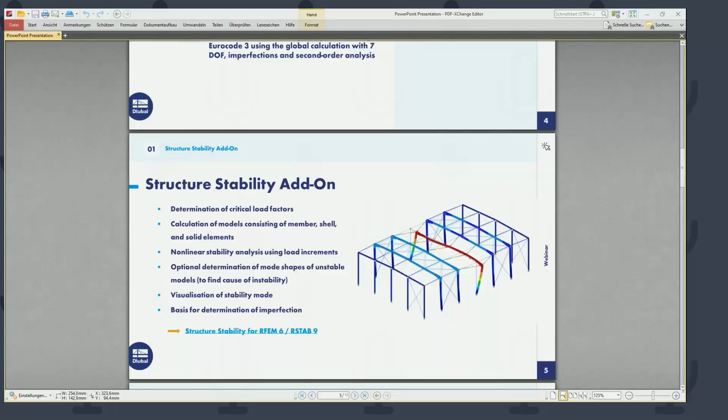First, I want to present the content overview. We are talking today first about the determination of the critical load factor using the structure stability add-on in RFEM. Then the second topic will be the consideration of cross-section warping in the global calculation using the torsional warping add-on for 7 degrees of freedom. We also want to talk about the lateral torsional buckling analysis according to Eurocode 3 using both add-ons in the global calculation, with 7 degrees of freedom, imperfections, and second order analysis.

The first thing we want to look at is the structure stability add-on. Here's a short overview of the features of this add-on. We can use it to determine critical load factors for our structures and also calculate models consisting of member, shell, and solid elements. In this webinar, I'm going to present members in the structure stability add-on, because we also want to show the combination with the 7 degrees of freedom calculation. Shell elements and solid elements will likely be part of another webinar in the future.

Another feature of the structure stability add-on is the nonlinear stability analysis. We use incremental loading to calculate nonlinear systems in this add-on. There's also an option that helps us determine the mode shape of an unstable model, so we can find the cause of the instability. We will look at this in the webinar today. We can also get a graphical representation of the stability mode shape and use it as a basis for the determination of imperfections.

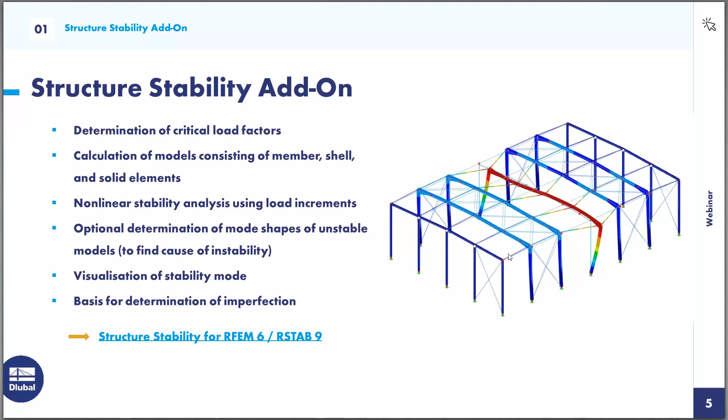So I will switch to RFEM for the first example. It's a very simple example: a simple steel frame with rigid frame edges and simple supports. We have one loading condition, with vertical loading and a horizontal load. We want to look at all the settings necessary to perform a stability analysis with the structure stability add-on for this example.

First, if you want to use the structure stability add-on, we need to activate it in the base data dialog. I go into the edit model base data dialog, and there's a tab for add-ons where we can activate the structure stability add-on. You've probably noticed that in the main tab of the base data, we've chosen the model type 2D. So if we have chosen only this 2D model type, the structure stability analysis will also be performed in this 2D plane stress environment. We will see, in the first step, only mode shapes for this 2D structure.

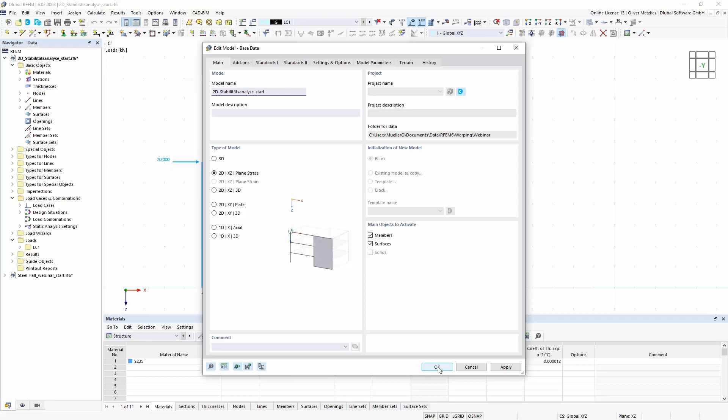Now that I have activated this add-on, we see in the navigator for the data that we have an additional stability analysis setting. Without the stability add-on, we don't have this setting, but now it's here with already two predefined stability analysis settings.

If we open the first one by double-clicking on it, we see that in this stability analysis settings, we can set all the options that we want to consider for our stability analysis. An important choice is the stability analysis type: we have this linear eigenvalue method for determination of the critical load factor, and also an incremental method for calculating nonlinear systems. In my example, I only want to use this standard eigenvalue method for the linear system, and I don't want to change the other options for now.

When we have our stability analysis setting, we can also assign it to our load case to start the structure stability analysis. I can edit my load case number 1 by clicking the Edit Load Case button, and then we see that if we have this stability add-on activated, we have an additional option here: Calculate Critical Load Structure Stability Add-on. If we activate it, we can choose in the drop-down list our corresponding stability analysis setting that will be applied for our stability analysis.

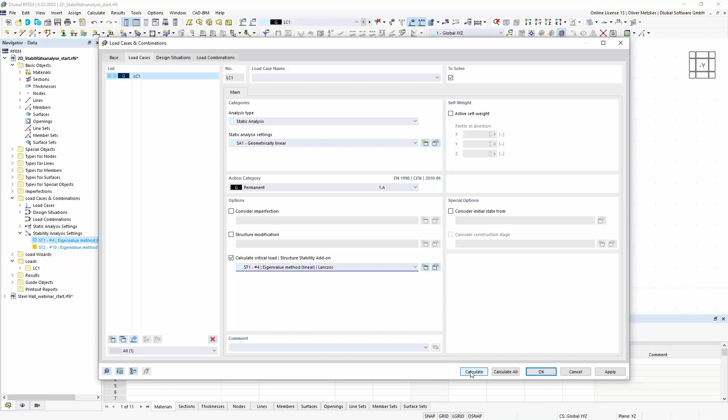If I calculate now my load case number 1, we will see in the calculation diagram that first the static analysis is performed of load case number 1, and that is used as a basis for the stability analysis. When we have calculated our load case number 1, we will get the internal forces and support reactions for the static analysis, and we can also switch to the results of the stability analysis.

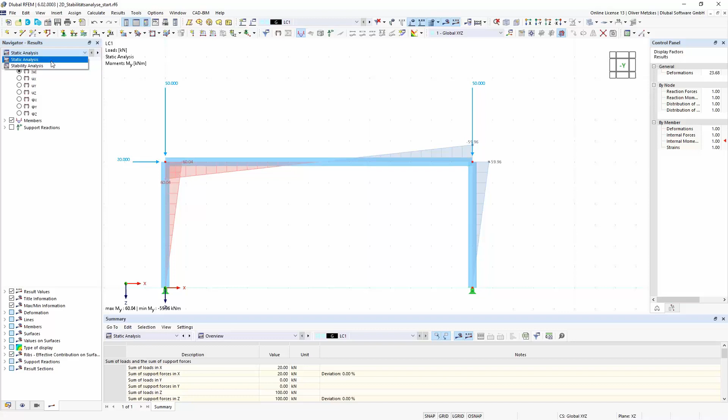In the navigator for the results, we have a drop-down list where we can switch between static analysis and stability analysis. If we switch to stability analysis, we will see the graphical representation of the mode shape, and by default for the members it's represented by line display.

We can also choose the display mode. Here in the navigator for the results, we have options at the bottom. If I choose to display my deformations for the members by colored sections, I will get this colored representation with the sections, which is mostly easier for the imagination of the mode shape.

I also get the results in the tables. So in the result tables for stability analysis, I will now see my critical load factor corresponding to the first mode shape. For this example, the first critical load factor is 33.6. That means if I multiply the load of my load case number 1 with 33.6, I will have the stability failure with this mode shape of my simple frame.

Okay, so that is the result that I get, and I also get further mode shapes according to my setting in the stability analysis settings. Now, I have said that this is only a 2D structure, so the first mode shape is this in-plane flexural buckling of the frame, and I don't get any out-of-plane buckling shapes.

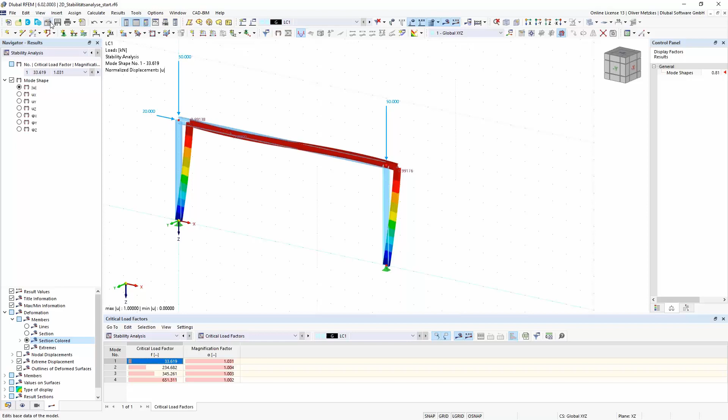If I also want to consider the out-of-plane buckling, I can go into my base data dialog and change the model type to 3D. I will do so. And then I can also just try to calculate it again.

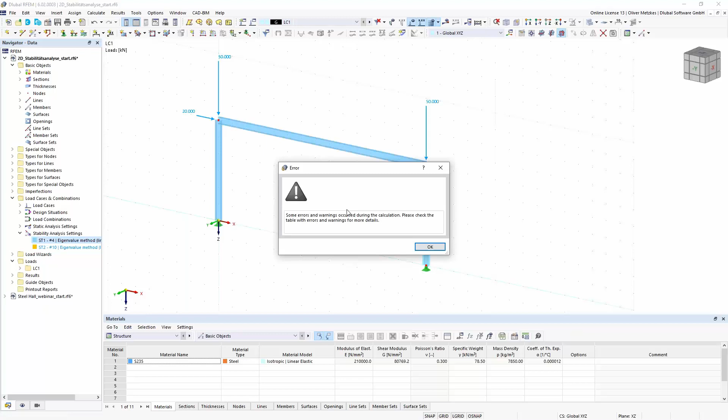Then I will see I have not changed anything with my support conditions. So the result of the calculation in this 3D model environment now will be that there's an error because the structure is unstable. For my easy structure, it's very easy to determine the cause because I have not changed my supports—I have the simple supports here, but I don't have any support in the out-of-plane direction. So for this case, it would be easy to say there are supports missing.

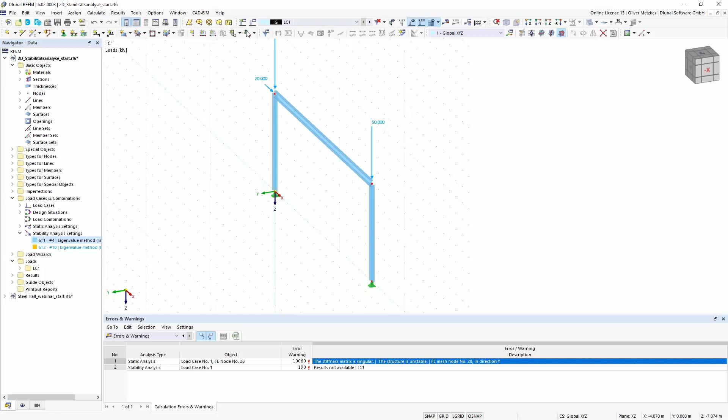But also if you have more complex models and you get this error for instability, the structure stability add-on can also be helpful. As I said in the overview, there's another option: if we go into the stability analysis settings, we have this option for calculation without loading, for instability check by mode shape. We can use this method if we think there may be an instability due to modeling issues, if maybe you have forgotten a support, or also if you have nonlinearities.

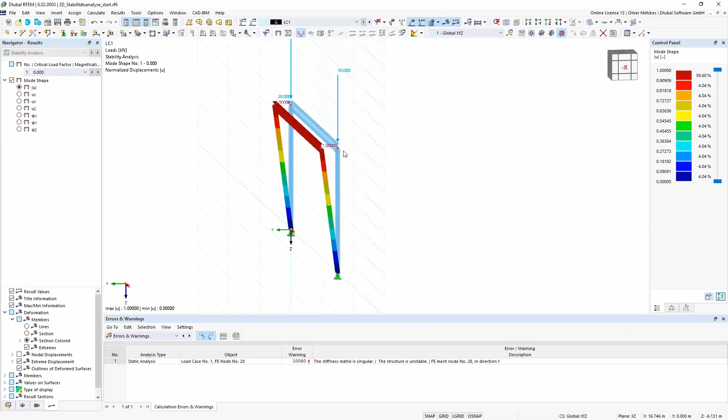Okay, to check if it's maybe a modeling problem that your structure is not stable, like in this case, you will get the mode shape of the unstable structure, and then you can easily see what the problem is. In my case, I don't have any support in the out of plane direction, so I will see that the frame will have high deformation, and there won't be any restraint, so it will not be a stable structure that can be calculated.

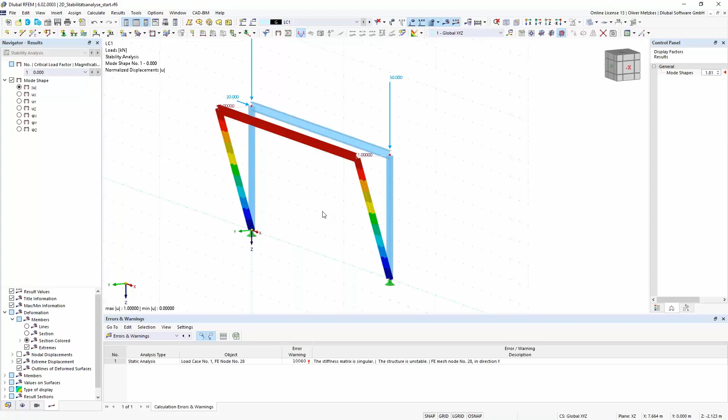So this option is also in the structure stability add-on that can help you in case of modeling issues with instability. In my case, it would be easy, so I just wanted to place some supports here. I will have the supports in Y direction at the frame edges. I select the Y direction here and assign it now to my frame edges, here and the other one.

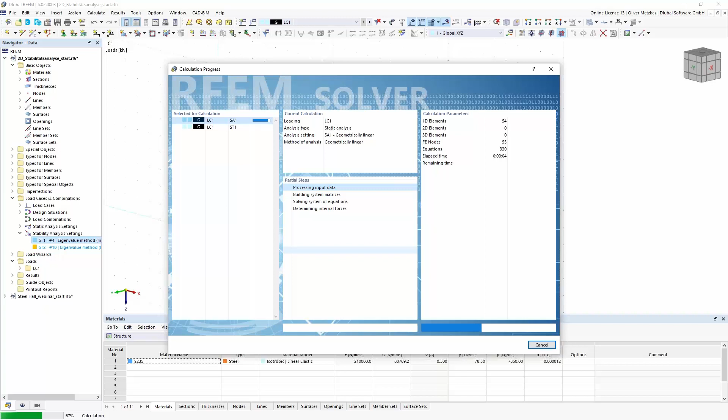Perfect. So now I can change the setting back so that I calculate my mode shapes with loading to get the corresponding buckling shapes. I will calculate it again, load case number 1, now also in the 3D model environment. So now I would expect to get also out of plane buckling shapes.

I switch to stability analysis results, and now I see that the first mode shape is no longer this in-plane buckling, but now we get also out of plane buckling for the beam and also for the columns. For example, for this column, now I get this mode shape for out of plane flexural buckling with a critical load factor of 13.

So the result of the stability analysis add-on is not only the critical load factor and the mode shape, but we also get the calculation of critical loads and also of buckling length. So if we go into the result table, results by members, we will also have additional tables like effective lengths and critical loads by member.

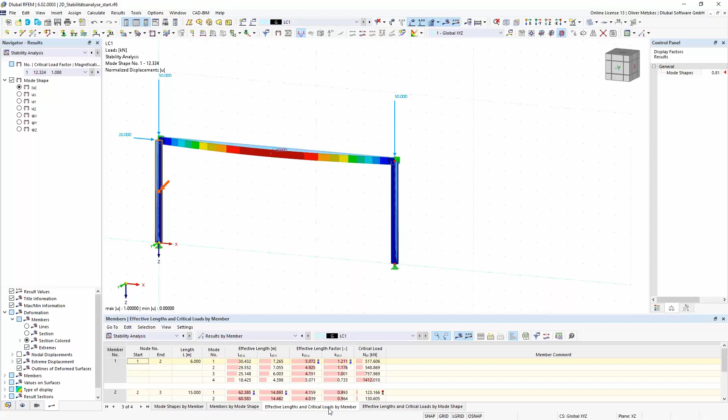Using this load amplifier, the stability add-on already automatically calculates critical loads for each member and then determines effective lengths and, corresponding to the member length, also effective length factors.

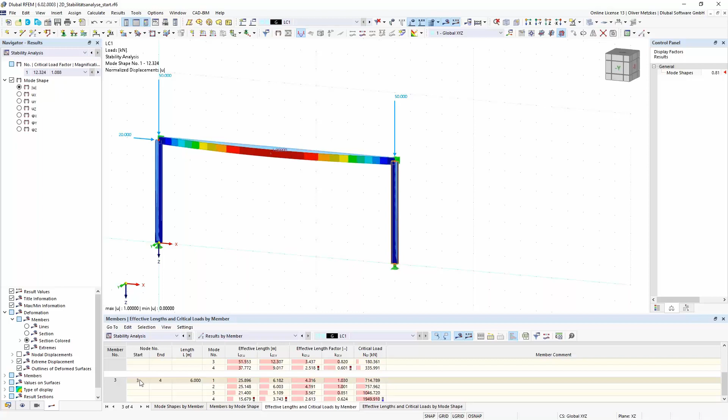So if, for example, we want to look at the effective length of this column, I click on it, it's member number 3, then we have to look also at results for mode shapes where this member is affected. So mode shape number 1, that would be for the beam, but mode shape number 2, that is the one for out of plane buckling of this column.

So as it is out of plane buckling, it would be buckling around the weak axis. We can also display the axis system, so buckling around the z-axis, and the corresponding principal axis now would be the v-axis. So we have to look at member number 3, mode shape number 2, and L critical V. So it's an effective length of 6 meters, and the corresponding effective length factor would be 1.0.

That is as expected, as you would say the critical length for this column with hinged support conditions at start and end would be the member length. So this would be the effective length for buckling around the weak axis, and buckling mode shape number 4, that is now still this in-plane flexural buckling, that would be for buckling around the strong axis.

So member number 3, mode shape number 4, and now it's L critical for the U, around the U axis, around 16 meters, and this effective length factor of 2.6.

So those values could now be used if we want to perform, for example, stability design checks according to the equivalent member method. Then we could also use these effective length factors for the further design. So we get from the stability analysis result mode shapes, critical load factors, and also effective lengths for the members. I think that is good.

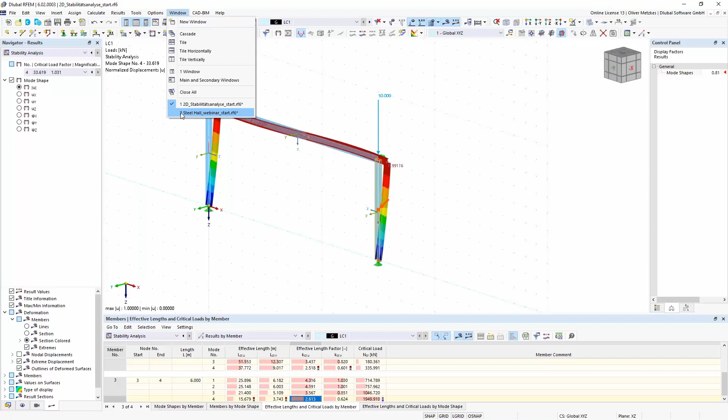We have seen all this input on this simple example. And now I want to also give you some hints about the behavior of the stability analysis add-on in a 3D model. So now I switch to my next model for this webinar.

It's a steel hall with simple frames, so rigid frame edges, also simple supports, and a certain loading. I have simplified it a bit, so I only have self-weight and snow load, and then wind loads only one per direction, so I have not considered also the negative ones, for example. It's a bit simplified, but I think for our example today, it's a good example.

Now you can also calculate critical mode shapes with the stability add-on for this 3D structure with consideration of all the structural elements. So the whole structure is considered, and you don't need, for example, to consider any spring stiffnesses for members that are not considered, like the bracings. It's already considered in this 3D model with its corresponding stiffness. So we can have a look at it.

First, for sure, we would need to activate the add-on in the base data dialog. So add-ons and structure stability.

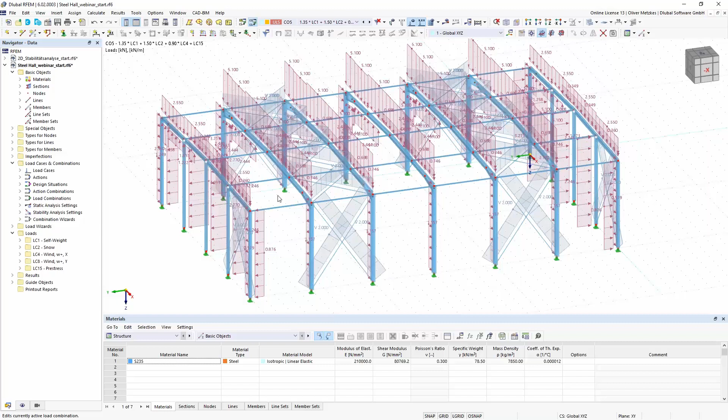Now we also have the stability analysis settings in here, and we can assign it to our load case. So if we want to determine the critical mode shape, we can select a load combination where we think we have the most governing load, like combination number 5. I can also activate calculate critical load for the structure stability add-on, so this setting can be assigned to load combinations and not only load cases.

So now, again, first static analysis of the load combination and then stability analysis using the internal forces that have already been calculated. We see the mode shape number 1 for the critical load factor of 10.8 in load combination number 5 is displayed here.

So now that's only one load combination. For a structure with lots of load combinations, it would be interesting to find out which one would be the governing one for the stability analysis. So the wish would be to analyze the stability of all load combinations, not only one. That is also possible.

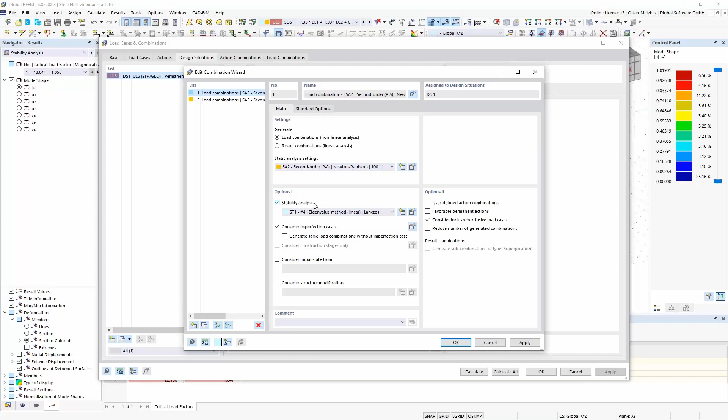We can go into the combination of the loadings, so design situations. As you probably already know, all the rules for the combinations are set into this combination wizard, which we can modify. There's an option for stability analysis, and with its activation we can activate the stability analysis for all our load combinations created by this combination wizard.

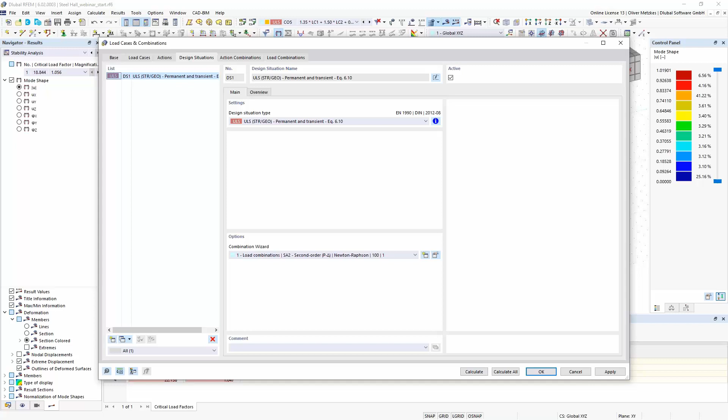So I will activate stability analysis and recreate my combinations. I set it here again, they are recreated, and we see now every load combination will have this calculate critical load option activated. If I now calculate design situation number 1, I will get all the results of all the load combinations calculated by stability analysis.

In the results, I don't have to look at each combination one by one, but I also get the results of the most critical load factor. We will look at this result in the result tables. So if I am in my design situation, in the summary of the static analysis, I will also have this additional line of minimum critical load factor.

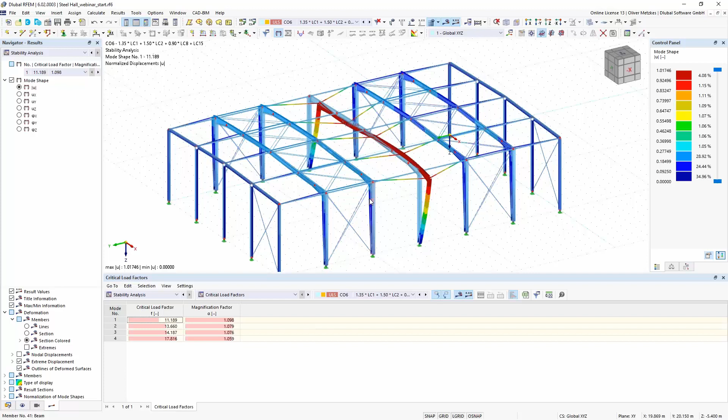So now we see the most governing one is load combination number 6, with a critical load factor of 11.1. We can then look at combination number 6 and the results for the stability analysis, and we see it's also this mode shape for in-plane flexural buckling. That is the most critical stability issue for my load combinations present in design situation number 1.

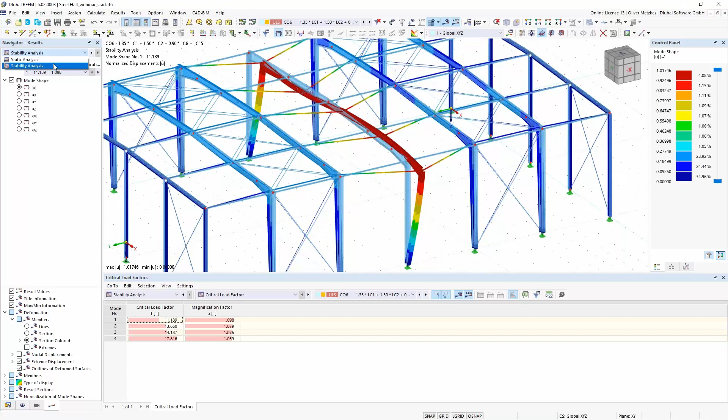If we look at this mode shape, we see it's in-plane flexural buckling. But when we look at the internal forces, we know that from our loading—snow load, wind load—we also get a bending moment My. So we would also expect to have a lateral torsional buckling problem of our main beam, but we haven't seen this mode shape from the stability analysis.

The reason is that in our standard RFEM and RSTAB calculation, we only have the 6 degrees of freedom solver implemented. So for the stability analysis, we can cover flexural buckling, but we don't get the mode shapes for lateral torsional buckling unless we have the additional add-on activated for the 7 degrees of freedom.

For a short overview about the possibilities, I want to show another page in the PowerPoint. We want to look at the stability failures of members. As we already know, we have the stability issue of flexural buckling: a compression force in the member, and as a stability mode shape, we get this lateral deformation. There we have the critical loads, critical for buckling around the principal axis or the geometrical axis—strong and weak axis—the flexural buckling mode shape.

But there are also other stability issues. We also have the torsional buckling mode, which is mainly an issue for cruciform members, for example. As a stability mode, we get just the deformation around the longitudinal axis, so no lateral deformation.

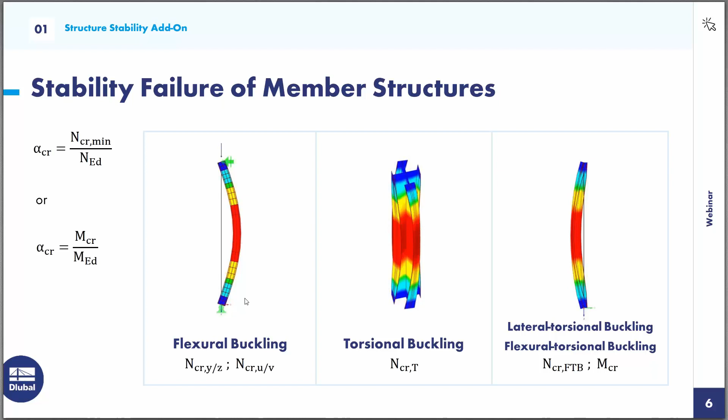So that leads us to our next topic, the torsional warping add-on, 7 degrees of freedom. In general, we can use this add-on to consider the cross-section warping as an additional degree of freedom in the calculation of our member elements. We can use it also in combination with the structure stability add-on, so that we can also determine critical load factors and mode shapes for stability modes like torsional buckling or lateral torsional buckling. The whole add-on is fully integrated in the programs RFEM and RSTAB.

So for example, for channel sections, we can't use the equivalent member method according to Eurocode 3. We would need to consider the lateral torsional buckling problem by using second order analysis with 7 degrees of freedom and also consideration of imperfections. We will also look at this lateral torsional buckling check later. And we can also use this add-on to consider it in the stability analysis of the global model so that the stiffness of all the connected structural elements is considered correctly.

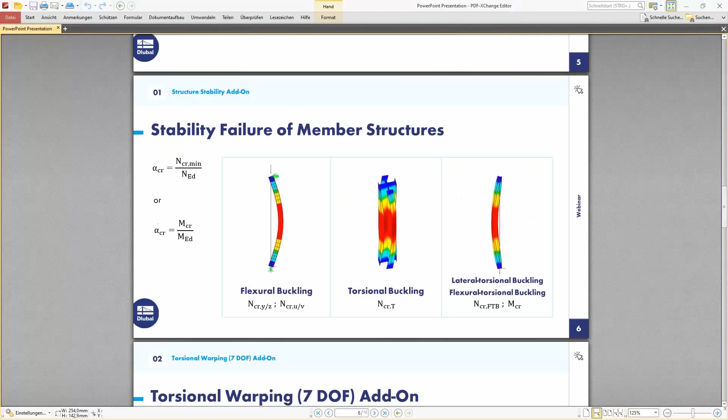Okay, now I want to begin with a very simple example. The example I want to show now is a craneway girder, which I want to model in RFEM 6, and I want to show all the necessary input for the application of this torsional warping add-on. So I just want to create a new file, and it would be this craneway girder, and I want to activate the add-on torsional warping.

Maybe I will go back to the main tab, because you see I use now the model type 3D. If I want to use a 2D model type, for example, then I can't activate this torsional warping add-on, because if you want to consider the 7th degree of freedom, then it's already a 3-dimensional calculation method of the members. So we would need at least this 2D/3D model type, or the 3D model type. So if you have only 2D, then you see torsional warping is not available. So now we use 3D model type, and then we can activate the torsional warping.

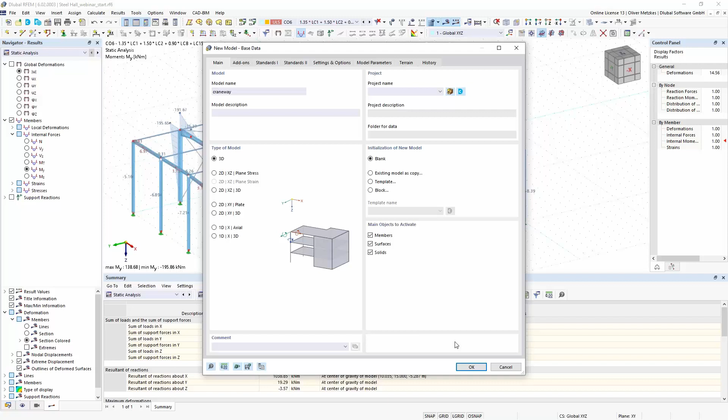And as I want to calculate a craneway girder now, I also changed the load case classification for the crane rail. Okay, so in this example, I don't want to deal with all the necessary design checks for the craneway girders, so we don't have them implemented yet in RFEM 6. So no fatigue design checks, for example, and we also don't have this moving load situation. That will be implemented later.

But now I only want to show this example because then we can look at all the details for the calculation with the warping torsion add-on, because we will get this torsional moments inside our craneway girder. Okay, it would be a very easy example for the beginning.

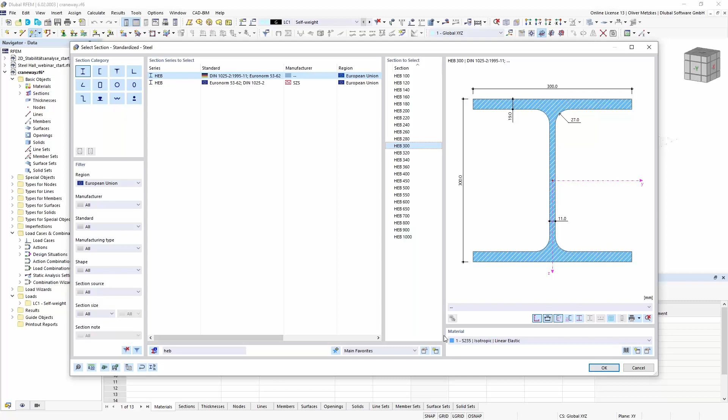So we will start also with an I-shaped section. I want to have an HEB 300. So I just select it from the library, and I use this search function at the bottom to have it only in my list, and then HEB 300. Okay, for the material, it should be an S235, so that is already okay with the default material for me. So I confirm the setting and create my member.

I want to have it with 12 meters of length, so I can just pick the points of this line grid here. Okay, so that is my member, and now I want to place supports. So I want to have also a torsional restraint at the beginning.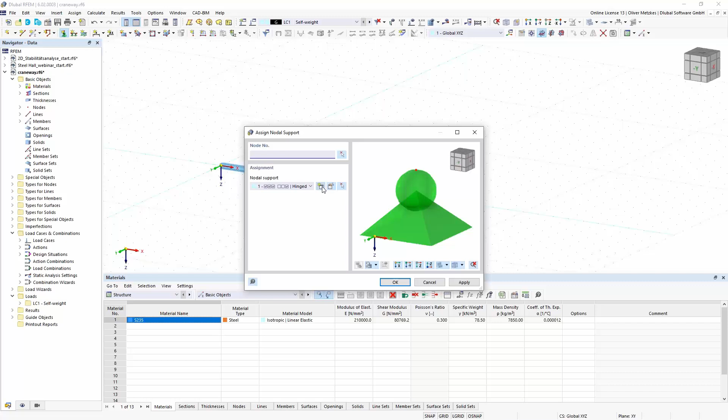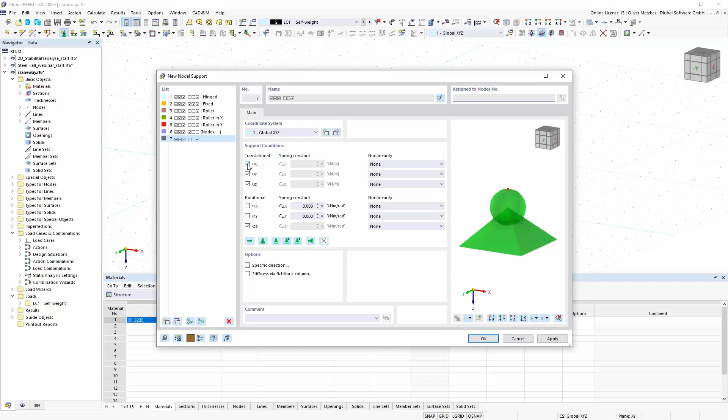Okay, so all the deformations and also the rotational restraint around the x-axis, and also another support at the end. So it will be the same, but now I don't have this longitudinal deformation fixed.

I also want to consider an additional support in the middle, so it should be a two-span beam. And now I use this function of dividing the member. So I right-click the member, then in the members I choose this divide member by intermediate nodes.

I can select one intermediate node, and now I want to use this option, create nodes on member without dividing the member. That is important for the warping torsion analysis, because only if the member is considered as one member without division will the torsional warping be continuous in this member. If I would divide the member, then those two members would be independent.

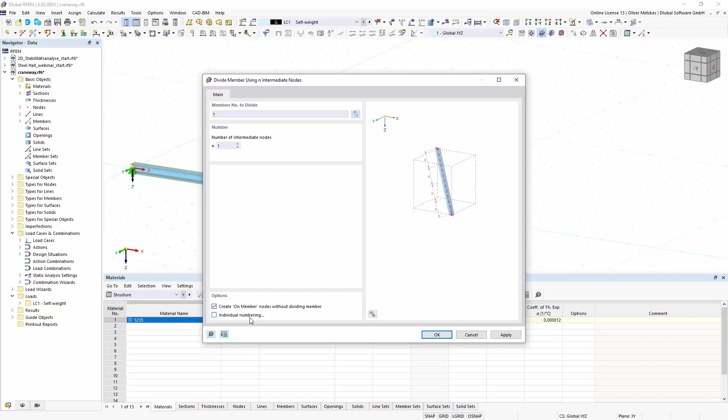We will later also look at this problem, and there are also solutions for that. But for now, I want to use this option to create only the nodes on member. So now I have this node on member, and I also want to have another support here, so I just copy this one also to the middle.

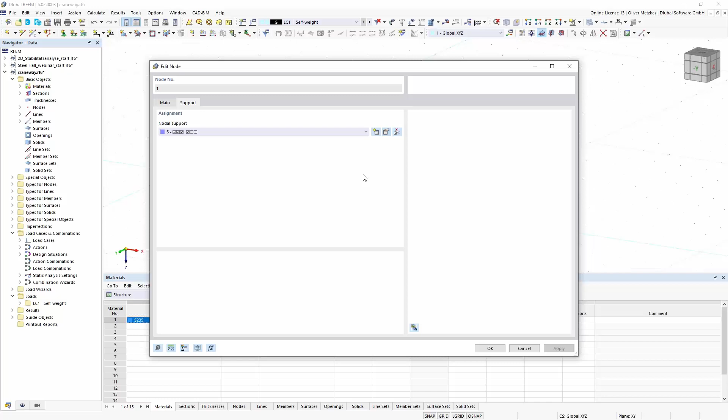Okay, so that is my beam and also the support conditions. And probably you have noticed that in the support conditions, even if we have activated 7 degrees of freedom, we only have 6 degrees of freedom for the support conditions. So in our calculation, we only have this torsional warping degree of freedom for the members.

So it is seen just as a member problem, and also as a member property, we would need to define warping restraints, for example. The nodal supports could also be used on surfaces, for example. So we have decided not to offer the warping restraint as a nodal support, but as a member property, because it's also only valid for the members.

And for this, we can edit the member, and then we have this transverse stiffeners. This additional type is used to place transverse stiffeners for the design and also supports for the warping torsion analysis. As always in RFEM 6, we have this additional tab, and now we can create types of transverse stiffeners, which could then be assigned to the different members.

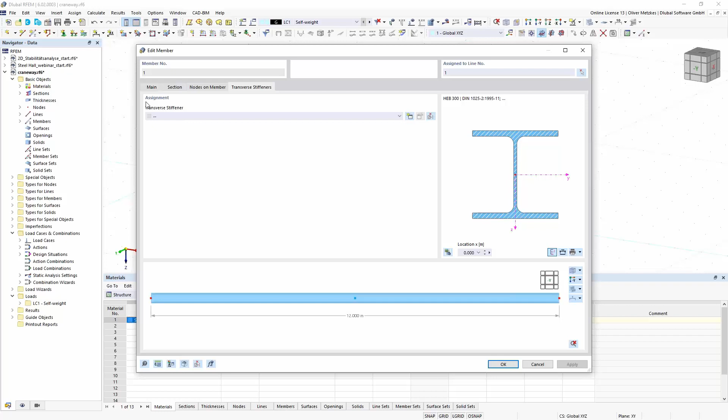So now we have this new type of transverse stiffener, and we can see as a stiffener type, we can select between different options. So we can place, for example, end plates at start at end, or also flat stiffeners, and also the warping restraint.

So in my example, I just want to place a full warping restraint at the beginning and at the end, and that is possible using this warping restraint option. There's the user-defined restraint also available, but I want to use the full warping restraint here.

I set one at the position of 0 and then a second one at the end. So I use the relative input by clicking on this button, and at 100% of the beam length I will have the second full warping restraint.

I also want to add a flat stiffener in the middle where I have my other support. So at 50% I have my flat stiffener with a certain material and thickness, so 20 millimeter, and also the width of 120 millimeters. You see that automatically the program calculates the resulting warping spring that will be used in the analysis. So from the input of the thickness and the width, we will get automatically with the cross-section properties the warping spring that will also be considered in the analysis.

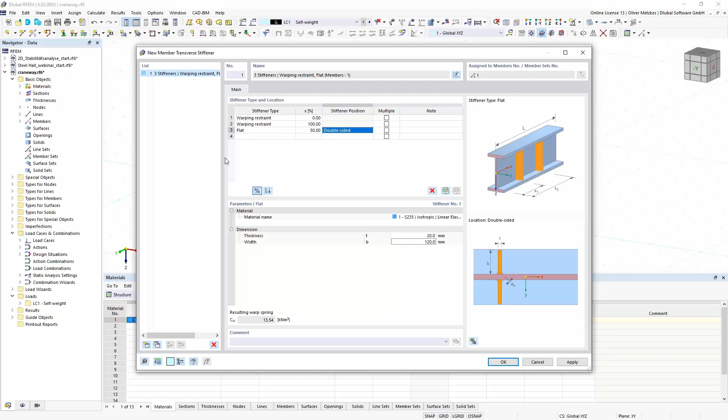So you can use this type of member transverse stiffeners to set all the warping restraint conditions for your member. Okay, we also see a certain graphical representation. So this is the full warping restraint, and here we have our stiffener placed in the middle.

Okay, so now we have our system, and we would need some loading. And in the load cases, we already have created this load case number 1 for the self-weight. And the self-weight is applied automatically by using this self-weight factor in the Z direction.

By default, if we have switched to warping torsion analysis, all the loads are applied also in the center of gravity. So also the connection between all the adjoining members and the supports, they are assumed in the center of gravity. And also the loads by default are applied in center of gravity of the cross-section. So that is a difference compared to the standard 6 degrees of freedom calculation in RFEM.

So we always apply the loads in the shear center, but now for warping torsion calculation, this additional torsional moment is important. So now it's really applied in the center of gravity.

We have already our self-weight loading, and now I want to also create some crane loading on my beam. As I have said, we don't have this moving load implemented for now, so I could create it by hand, and I will just first show it as an example.

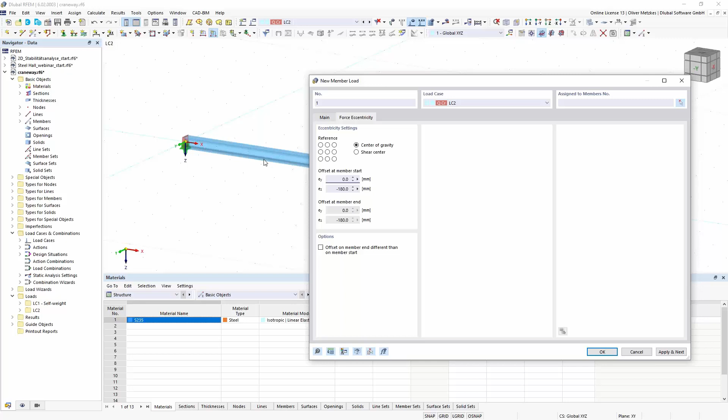But as I have an additional eccentricity, I just type it in here as a value, negative because the local z-axis is going downwards. Okay, I can just apply this load at member number 1.

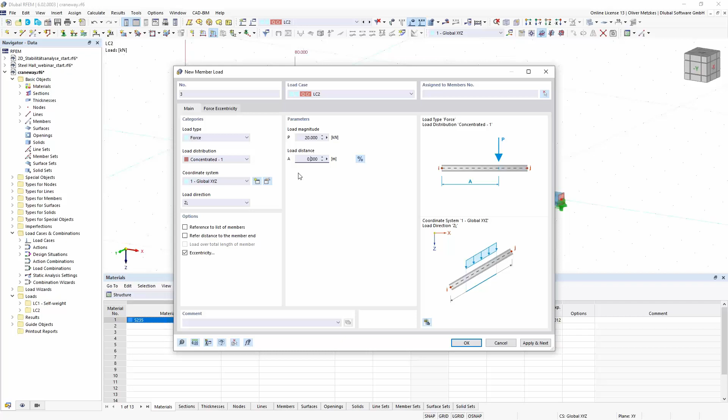And I could also apply another one, for example, a horizontal load: just one load with 20 kilonewton at the same load distance, now in the y direction, still with the same eccentricity. So I apply it to my member. So I can create the load manually like this.

So now I would need to copy the load cases because I want to have it moving, and then also change the distances for the first loading point and the second loading point. That would be possible, but it's quite a bit of work.

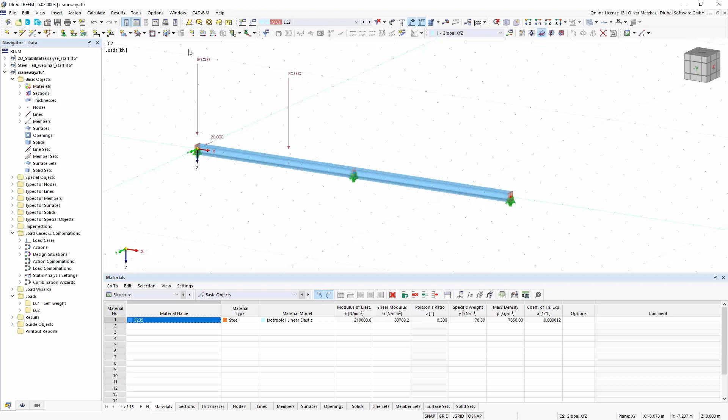So I want to use another possibility here. You have probably seen in the previous webinars that now in RFEM 6 it's always possible to use JavaScript code for the creation of the model. If you activate the script manager, we have it here in the list, and you will also get example scripts for this creation.

For example, in the examples, we have a simple beam one. If I just open it with the text editor, we will see there are also examples for creation of materials, how to create a node or a member, and for our case now, the important thing for the creation of a concentrated member load.

So you see we can create this member load by JavaScript code, also set this load distribution as concentrated, the direction, for example, and a certain load magnitude. So basically all the options we have in RFEM, they are also available in the scripts.

You can see all the options if you also open the console. We have it here with a small info button, and if we click on it, we will see all the objects and all its properties. So in our case, for example, it's a load case.

And we have also member loads inside, so it is here. Then you see we have all these options available: all the distances, also eccentricities, and you see how you can apply it in the code. That is always good if you need to find a certain property and about how to set it. Then it's relatively easy to create this JavaScript.

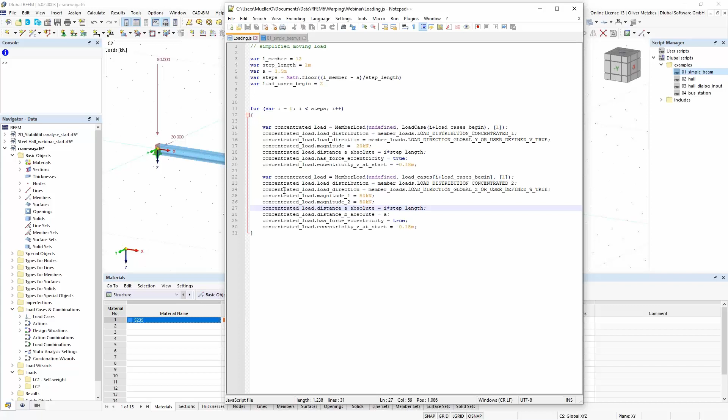And then also this concentrated load in vertical direction, as I have done manually, but now it can be done by JavaScript. So then I have this for loop that creates automatically the load cases and the loads in each load case. I think that is a very easy method, and it's not too complicated with this simple code snippet. To apply it, you can just copy it here into this console, paste it in.

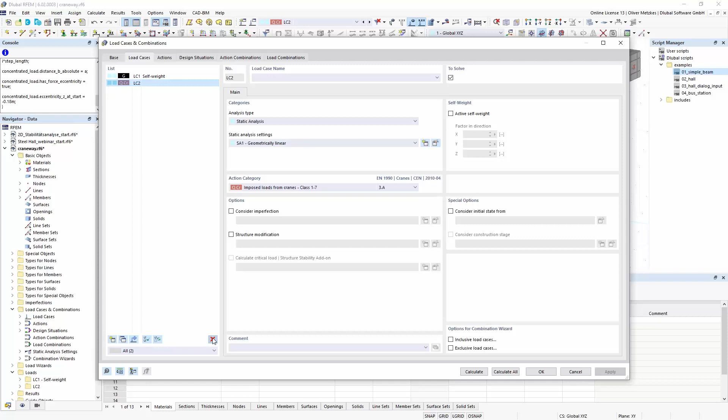Before applying it, I want to delete this load case number 2 again, because it will be created by the script. With the return key, I can just start the script. Now you see in my load case list, I have created those additional load cases with my member loads. If I click through them, you see it's this moving load, which I have simplified, applied by this JavaScript code.

So that's also an easy solution. If you have things that you want to automate, which are not implemented by default in RFEM, you can also use JavaScript to create the objects.

Okay, now I have my load cases, and I want to change the action category for them. So it's from the cranes, and they are alternative loading. So I will just change this action type to alternatively.

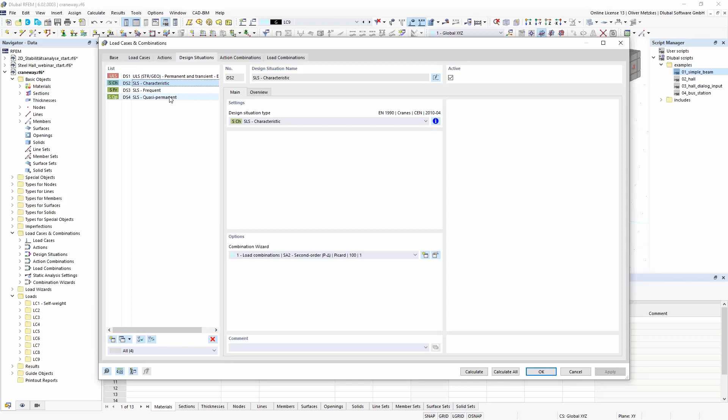Then we have our design situations and the combination rules. I think you already know that from previous webinars, like the steel design one. So in this example, I don't want to show it in detail, and I also don't want to look at the design situations for the deformations, but just for the ultimate limit state.

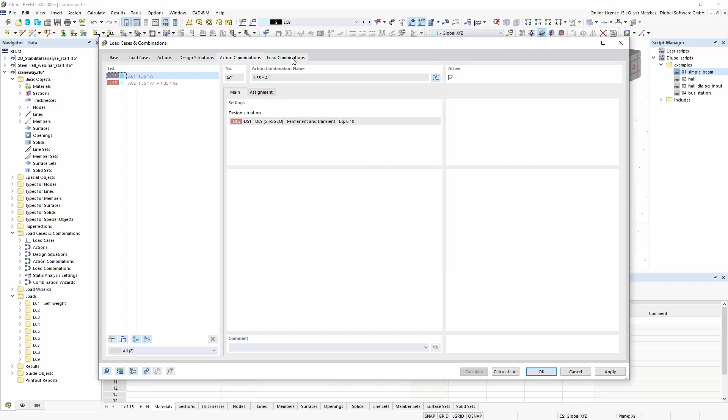Okay, now I have created my load combinations. So for each load step, I will have this combination. If I now calculate this design situation, I will get the results for my load combinations with the warping torsion analysis activated. So we will have a look at the results.

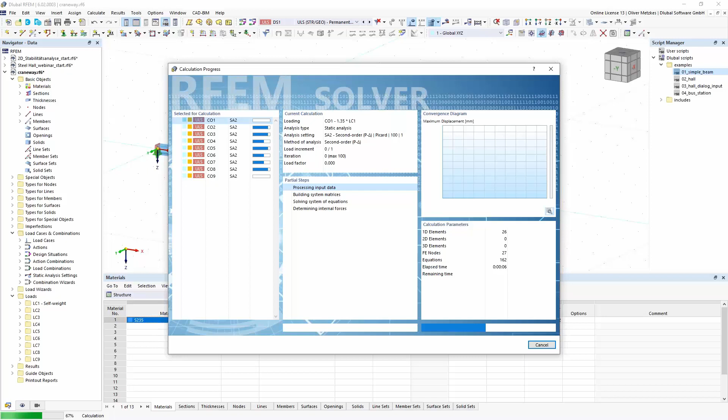And now we also expect to get the torsional moments correctly. So primary torsion, secondary torsion, we will get it here in the result navigator. In the internal forces, you will see we have this additional choices. So the bimoment, for example, and also primary torsion, secondary torsion.

And if we look now, for example, at a certain load combination, like this one, we have here our eccentric load, and so we have here this change in the secondary torsion because this load is applied. Also the warping deformation, we will get it as a result in the local deformations.

Okay, so now we have calculated our load cases, and that could be used now for the steel design, for the cross-section design, without the stability analysis.

If we now also want to perform our stability analysis, so in this case it would be a lateral torsional buckling check, we want to consider also the torsion correctly, so we would need this add-on with 7 degrees of freedom, a calculation according to second order theory, and also the imperfections. So that would be then our lateral torsional buckling check.

So in this case, I want to create the imperfections from the stability add-on. So I want to use the mode shape and scale it to the certain value so that I can easily create my imperfection. So we'll close this script manager again.

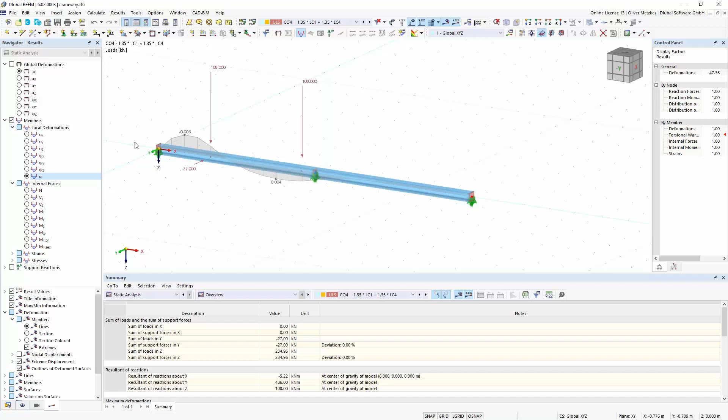But in my example, it would be easier to create this imperfection out of a mode shape, for example, of my self-weight load case, because then I would have this symmetric mode shape which I would need for my imperfection value. So in this example, I just want to apply it for this self-weight.

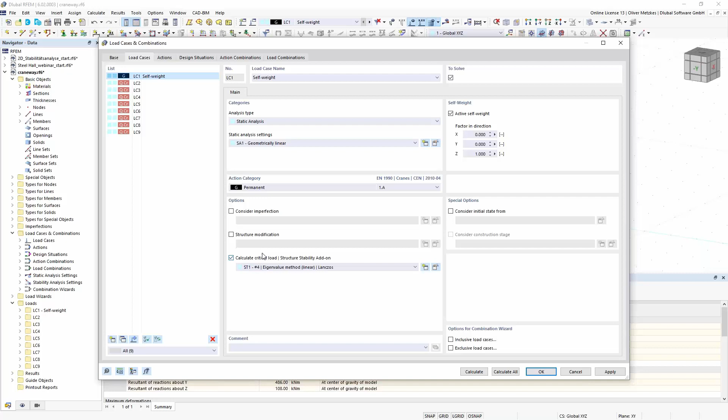So I activate this option, calculate critical load, and then calculate my load case number 1. And as we have now activated the torsional warping add-on, we now also expect a lateral torsional buckling shape.

So not only flexural buckling, but we will see it here if I activate the deformation by colored sections. Okay, and then we see now with the 7 degrees of freedom add-on, we get this lateral torsional buckling shape.

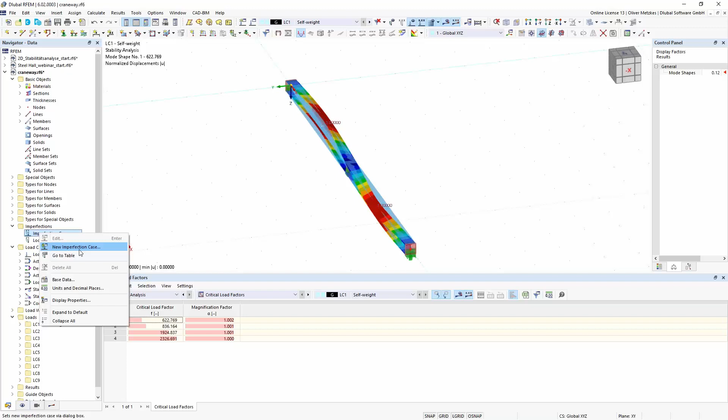And now I want to use this one to apply it as an imperfection. For that, I can go into my navigator data and create a new imperfection case. So in this imperfection, I right-click the imperfection case to create a new one.

And if we have the stability analysis add-on activated, we also have the imperfection type of the buckling mode that we can use. If I create imperfections from a buckling mode, I first have to select the load case. So in my example, it's load case number 1 and also buckling mode number 1.

And now I need to set the imperfection magnitude. So for our lateral torsional buckling design check, the standards are giving also imperfection values. So in the Eurocode 3, you will also get imperfection values for flexural buckling and also for lateral torsional buckling.

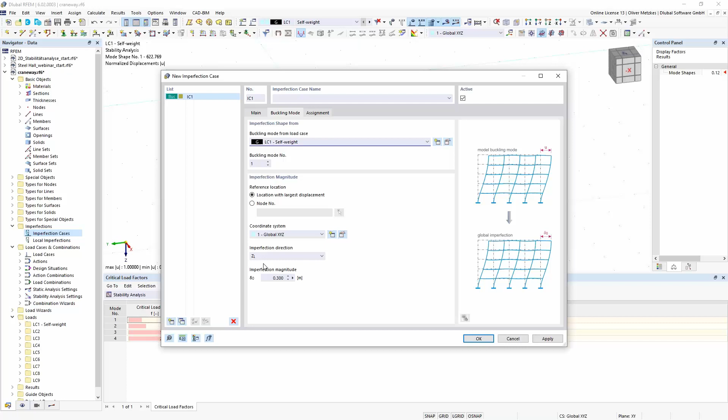And now you could also apply this imperfection. So in my example, as an imperfection value, I can use 1/200 of the reference length, which would be between the fork supports in this example. So this length and 1/200 of this length will be the imperfection value that I would need to use here.

It also depends on the national annex for the Eurocode, so it's always important to look at the national annex of your country so that you can set the correct imperfection magnitude. So if I want to set it here, I choose the imperfection direction in the Y direction, and then I could manually calculate the imperfection magnitude, or again, I could use the formula input, and also in these formulas, the JavaScript code is allowed.

So now I can also get the properties of all the RFEM objects. For example, from my members, it's member number 1. I can also get the length information here. So it was 12 meters. And now I want half of it because the support is in the middle, and 1/200. So this imperfection magnitude would be the value that I should use. And if I now change the member length, this value would also change because it's defined by the formula.

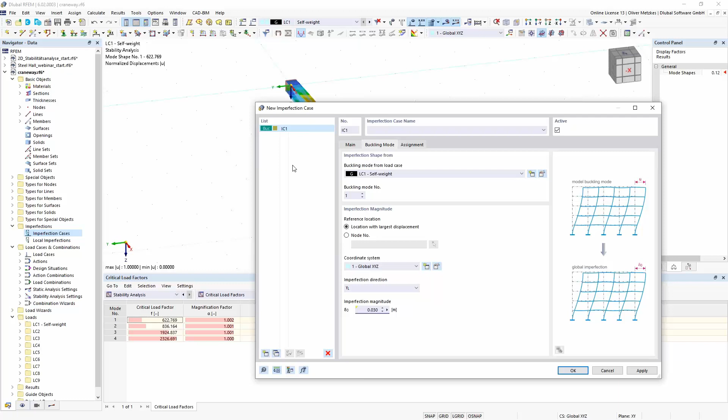In my example, I would also need to check the imperfection in the positive or in the negative direction, depending on the load case which I analyze. And as I want to analyze all my load combinations, I want to also set this imperfection in a negative direction. So that can also be easily done using this group of imperfection cases.

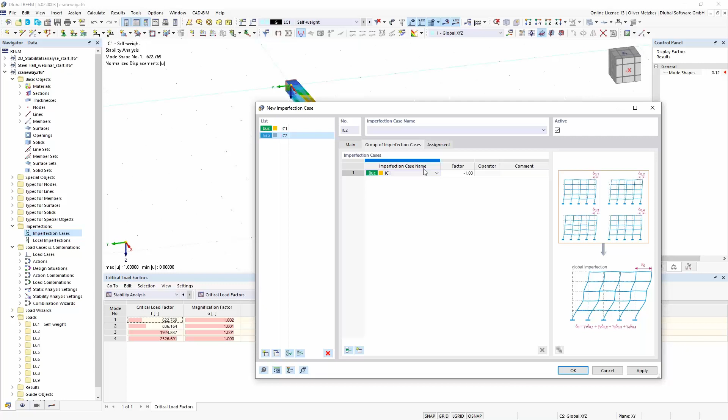So this imperfection type can be used, for example, to combine different types of imperfections. So if I have a global initial sway imperfection in the x direction and then want to combine it together with local imperfections like the one I have from a buckling shape, then I can do so in this group of imperfection cases just by adding additional lines and setting a certain operator. But in this case, I just want to use it for applying my imperfection case number 1, but with factor -1 so that it's just in a negative direction.

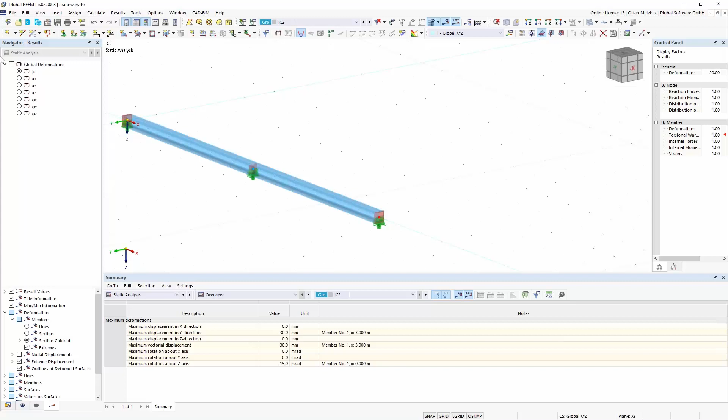I can also display the shapes of the imperfection cases. So if I just calculate this imperfection case number 2, then it takes the mode shape of load case number 1, scales it to the value, and as we have the negative factor, we will have it in a negative direction. And then we can look at the results for the global deformations.

So this is my imperfection shape now in imperfection case number 2. And now I can also calculate it for number 1. And you see it's just the opposite direction with the imperfection magnitude that I have set in the imperfection case. So imperfection case 1 and 2.

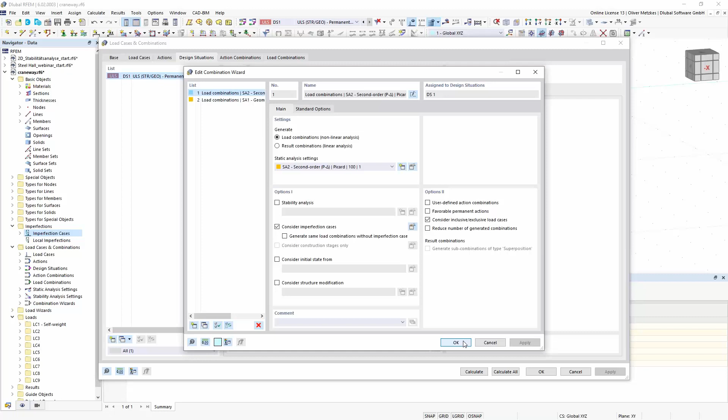I can now use the imperfection in the combination. So in my design situation number 1, if I look at the combination rules, in the combination wizard, I can here activate my imperfection cases, and then they are also considered in the combination. So if you look at the load combinations, we see now we have the same loading one time with imperfection case number 1 and then imperfection case number 2 and all the load cases.

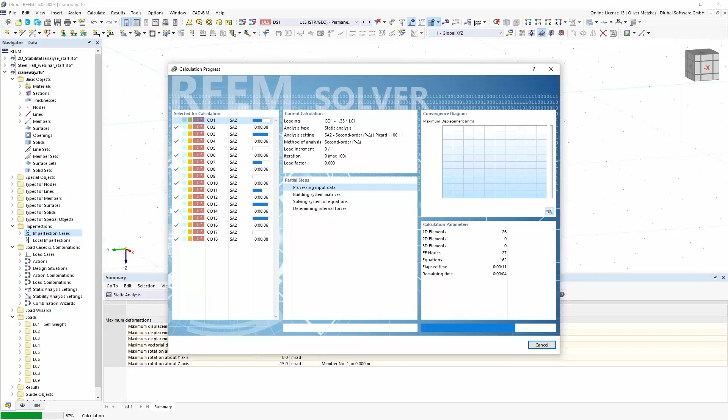So now if I calculate this design situation number 1, then I will get the internal forces calculated by second order theory with the imperfections and also the warping add-on activated. So I could use this internal forces in a cross-section design check, and that will replace my stability design check for lateral torsional buckling. So that is possible according to Eurocode 3, and then I could use those internal forces.

So all the internal forces I get now in this design situation number 1 can then be used also, for example, in stress-strain analysis add-on or also in the steel design add-on. So I want to show that before. So if I just activate my steel design add-on in the base data dialog, maybe it's also a good idea to just save the structure. So okay, I just saved it.

And then I activate my steel design add-on, and I can look also in the input tables. I think you already know this input from the steel design webinar. So we have our design situation where all our internal forces are considered. Then objects to design, materials and sections. That is automatically overtaken from the RFEM definition. And the important thing now for our cross-section design check, if you want to use it as stability design, we need to look at the ultimate configuration.

So if we go inside here, we can activate this option to perform the stability analysis with second order internal forces. For that we need this partial safety factor for stability design. Normally cross-section design checks use the partial safety factor gamma M0, but for stability design checks we need the gamma M1 partial safety factor. Depending on the national annex, this factor can be different, so we need to activate this option.

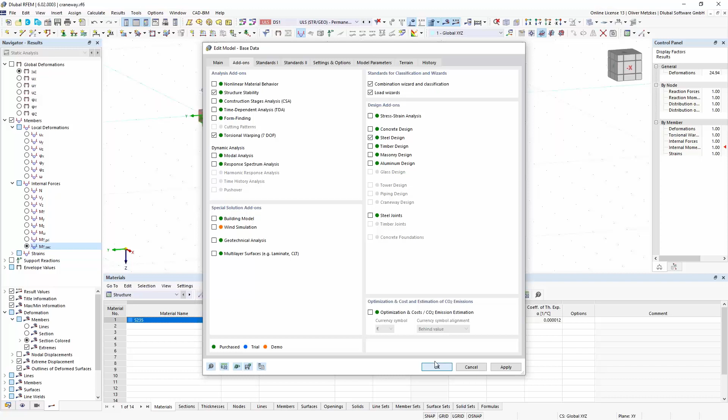We also don't need any other stability design checks, so no need to perform the equivalent member method again, because we already have all the effects in the internal forces. Now this setting is applied to our member. I see the add-on is deactivated again, so I will activate steel design, but I think all the settings have been made. Yes, this is the correct setting with this gamma M1 factor.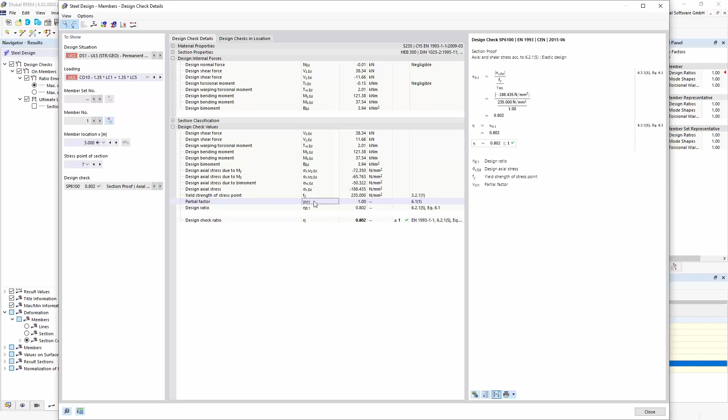Now I can also calculate my steel design, and I will see all the steel design checks with consideration of all the internal forces, including bimoment, secondary and primary torsion. If you look briefly at one of the design checks, for example the most governing one, we see in the results that we are calculating the equivalent stress, considering the stress from bending moment about the strong axis, weak axis, and also the axial stress from the warping bimoment. So all the necessary internal forces are included, and we also use this gamma M1 factor for our cross-section design check, because it's meant as a replacement for the stability design.

Okay, so I think we have seen now how to consider the 7th degree of freedom on this simple example, and what we would need as input. Now I think we can look again at our 3D model, so I will switch back to the steel hall that we had before.

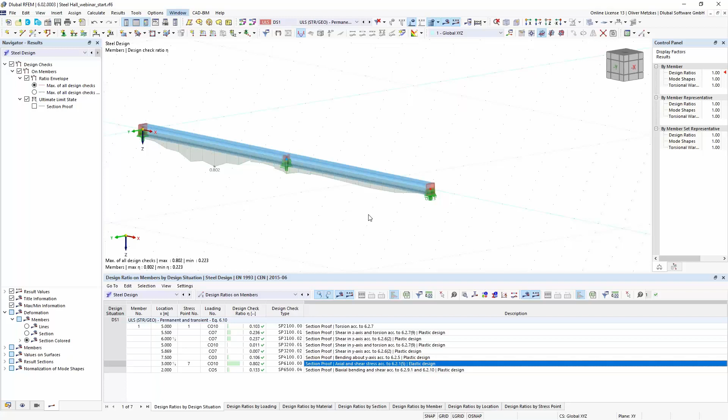Now we also want to check the lateral torsional buckling on this global model. For the beam girders, we would now also expect to get these lateral torsional buckling shapes. So first we need to activate the structure stability add-on. We have it already, and also the torsional warping add-on.

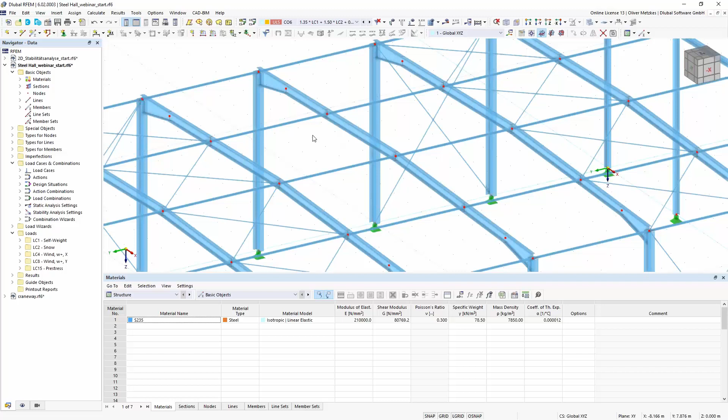Now I just want to give you some additional hints, because if we look at this model, as we have said, all the members are by default independently defined for warping. So all the members are free at their edges for warping. And now we still want to see these beams as a continuous one, so that the warping can be continuous in the whole beam. Therefore, we would need to create member sets.

That is the option if you have members which are not connected. So if you don't have internal nodes but real nodes, you can still consider them for continuous warping if you create member sets. So I will create the member sets.

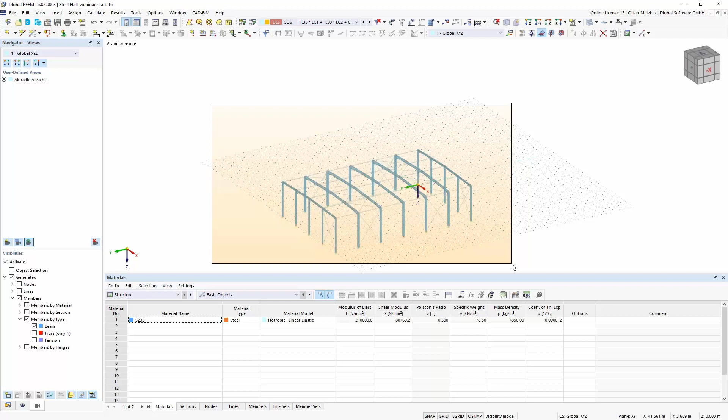For that, I will activate my visibilities for the members to only get the beam ones. So then I can select all the frames easily, and I don't want to have these additional columns here. Okay, so this one. I just right-click on the members and I can create the member sets here. It automatically recognizes that I have independent systems and tries to create the continuous member sets. So you see, I can now easily create the member set for all the frames.

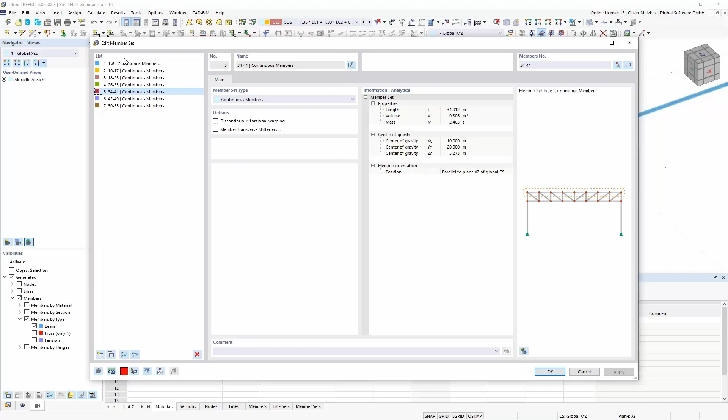So that makes it possible to consider those members as continuous in the warping, because that is a property of the member set object. If you don't want it continuous in the warping torsion analysis, you could activate this discontinuous torsional warping option. But normally when you create a member set, it is meant to be one structural object, so you will have continuous warping for all the members connected in one member set. That is the first important thing, that we can consider this beam as a continuous one.

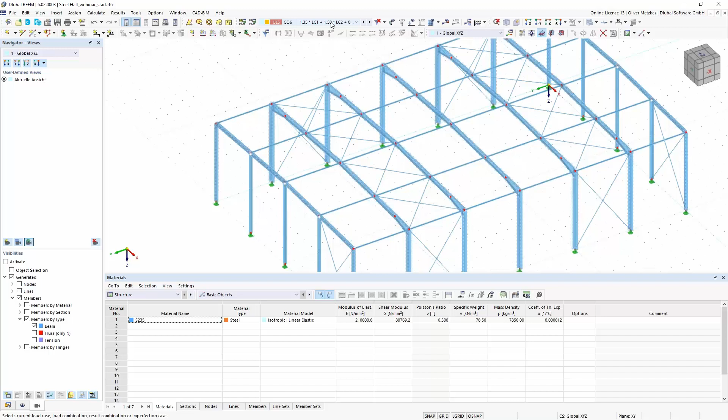And then we already know that the load application point needs to be defined by the force eccentricity. So in this example, I want to change the force eccentricity for this member load, applying it at the top flange. For the 6 degrees of freedom calculation it was not necessary, but now if I want to consider it in the warping torsion analysis, I also want to consider this eccentricity in the stability analysis. So I just added my member loads and set this eccentricity value here.

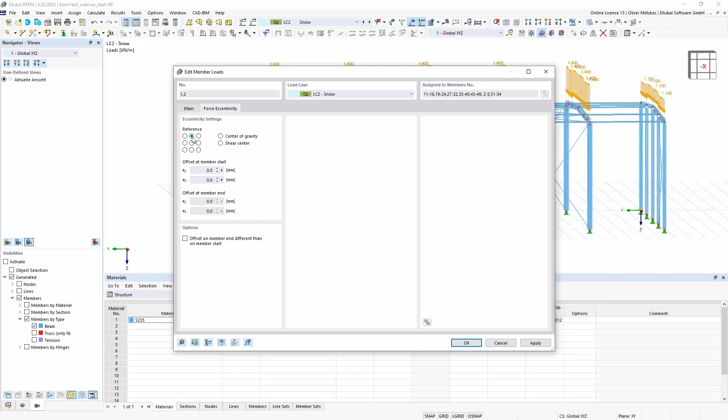In this case, I can use the simple reference point, because I just want to apply it at the top flange of the cross section for all these members. So I can use this simple reference point.

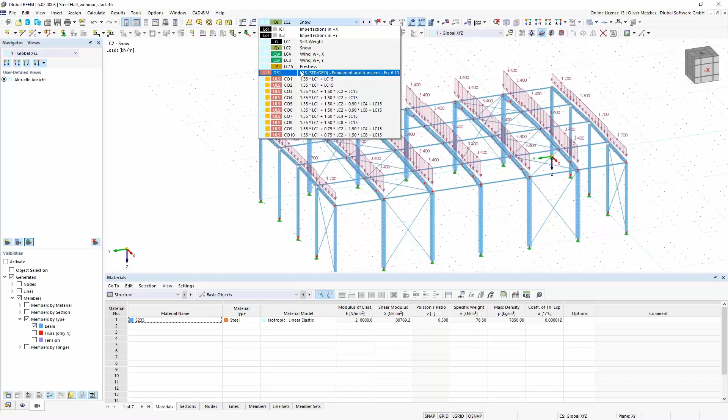Okay, so now I have changed those two settings, and I want to run the stability analysis. I think we still have it activated from the example before. So if I calculate my design situation number 1, I have my 10 load combinations, static analysis, and then stability analysis. Now I would expect to also get this lateral torsional buckling shapes, whereas before it was only the in-plane flexural buckling. Now I want to look at the most governing mode shape, which would be lateral torsional buckling.

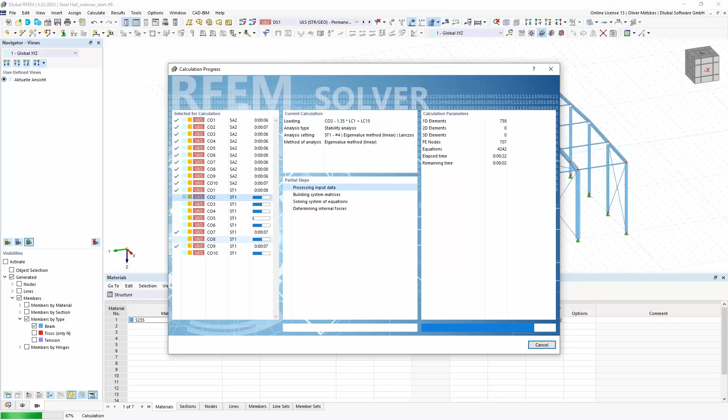So if we look at our design situation number 1, the minimum critical load factor now is not 11, but now it's 1.4. If we look in load combination number 6, in the results for the stability analysis, then we see that the first mode shape is also correctly found as this lateral torsional buckling shape. And automatically, as we are working now in a 3D model, also the stiffness of all adjoining elements is considered, so already the bracings and all the couplings between the members, that is correctly considered. So we get this critical load factor.

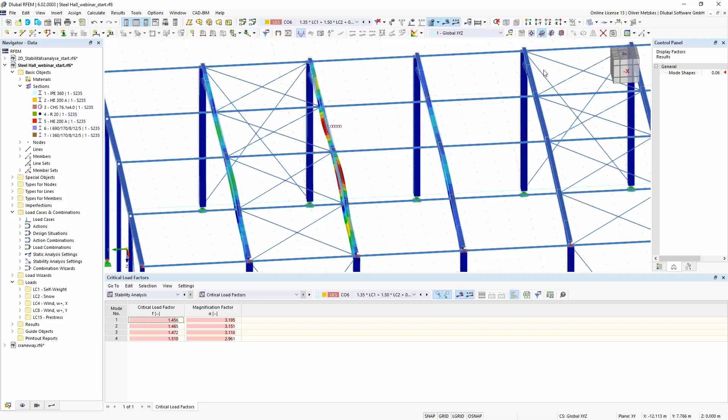So we can also do detailed stability analysis on a 3D model, for example, to consider also the coupling between beams that are not equally loaded, to also consider the stabilizing effect. You can also see that the structure is considered, for example, if in this example I changed the section of the bracing from a round section with 20 millimeters of diameter to one with only 10 millimeters. So in this example, I will just rerun the stability analysis now with bracing that has a lower stiffness, just so you can see what we will get as a result.

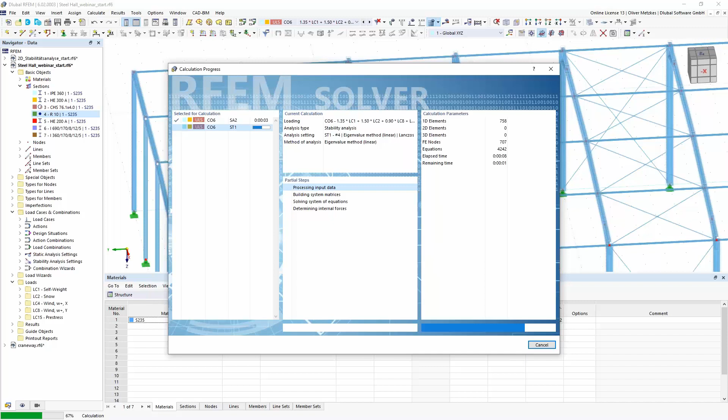So in this load combination number 6, before it was this lateral torsional buckling between the fixation of the bracing. But now we have a lower stiffness, and now it's not stiff enough to prevent this flexural buckling of all the frames. So now we have a lateral torsional buckling mode shape with critical load factor 1.1. The first one is now the most critical one with this lateral torsional buckling mode shape, not between the bracing fixation, because the stiffness is too low now. So we will have this global lateral torsional buckling here. You can see that this stiffness is directly considered of all the adjoining elements, and there's no need to calculate a certain equivalent spring stiffness, for example, in this 3D analysis.

So you can use this combination of structural stability add-on and torsional warping add-on also to perform detailed stability analysis on 3D models with member elements. Okay, so I think those were the examples that I wanted to present to you with the two add-on modules. Now I can give back to Andreas.